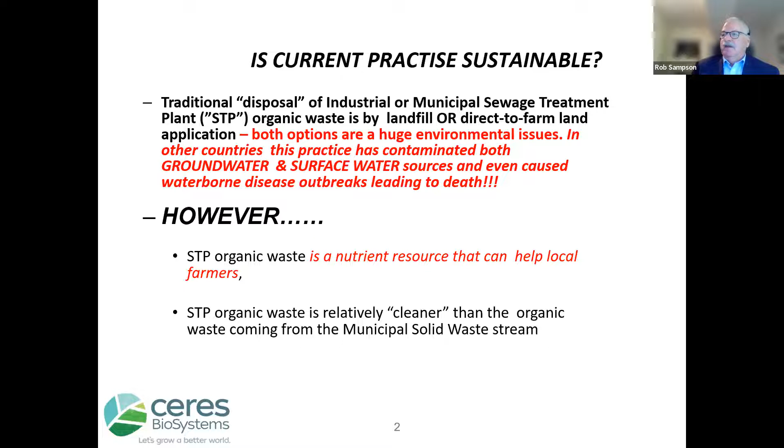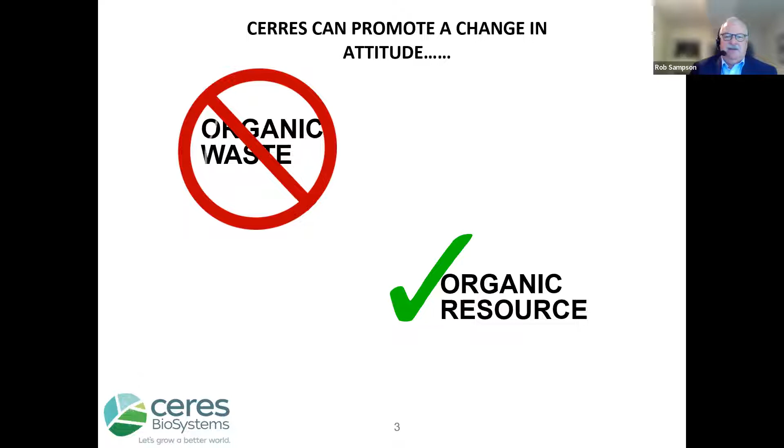In fact, organic waste should be and is now worldwide being seen as a source of nutrients for farmers. I just saw an article recently in the Times of India that says it's time now to think of organic waste as a resource and not as waste. And in fact, that's the attitude change that needs to happen worldwide, not just in India, because we can no longer continue, nor should we continue, to treat organic waste as a waste. It's actually an organic resource.

This is a picture of organic fertilizer that we are currently producing in India now, and we have been for about 6 years with the help of folks like Ravi and his team. And it indicates how we can indeed, on a commercial basis, not a laboratory basis, produce a final product that has nutrient value for Indian farmers.

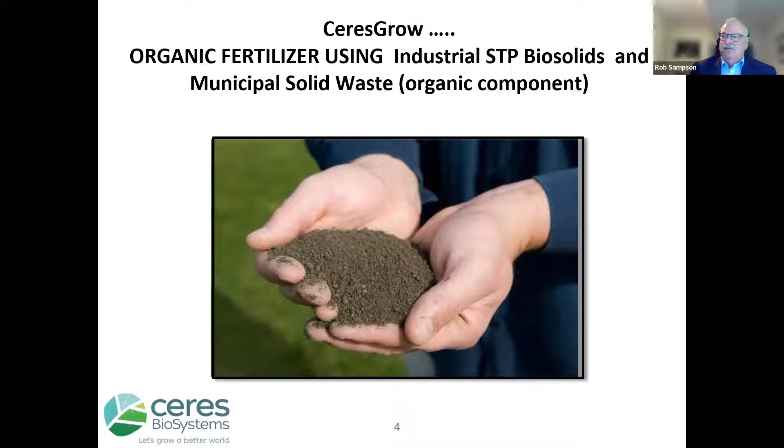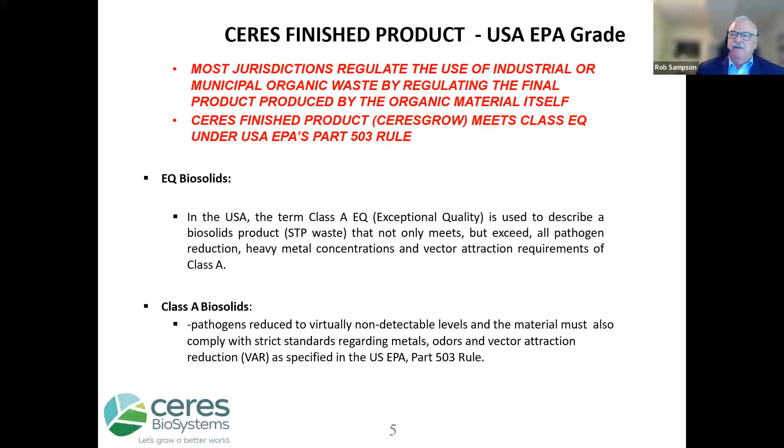The first two here, EQ Biosolids and Class A, are allowed by regulation to be applied to fields as a final organic nutrient to the farmer. The final category, Class B, is generally not allowed to be applied, or if it is allowed on farms, it's highly regulated and application is limited, primarily because of the pathogens that are still contained in the final product.

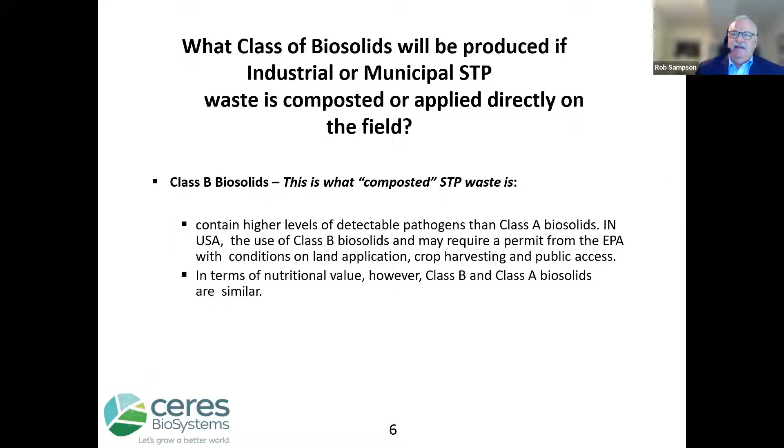Our final product is a fully pathogen-free fertilizer, and it compares quite favorably to commercial fertilizer. You would know it as urea or DAP, either a nitrogen or a phosphorus additive to farm fields. In fact, not only is our product full of nutrients, nitrogen, phosphorus, potassium, and organic carbon, it's also pathogen free. In other words, even though the original raw material is organic waste containing pathogens, our product contains no pathogens and can be handled quite easily by the farmer.

Interestingly enough, we have done some analysis, and some work's been done by the Canadian government on our product as it relates to its GHG impact. And it's been proven that there are up to 2 tons of GHG credit for each ton of the organic waste material that is consumed in our product. That's a credit.

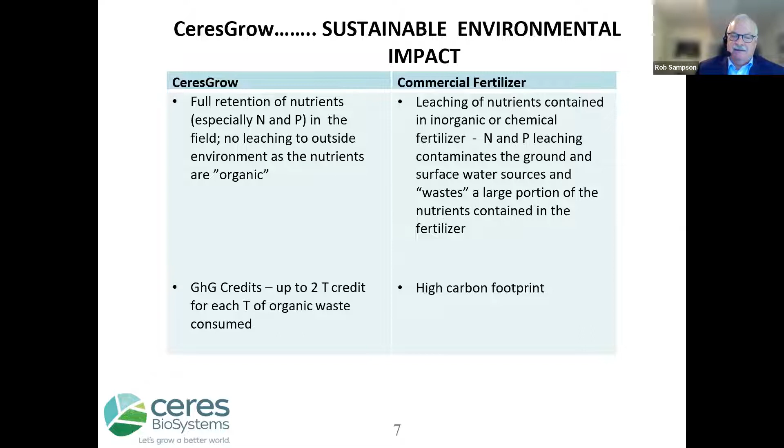Other advantages to our product is it reuses organic waste, along the theme of treating organic waste as a resource, not a waste. It minimizes the wastewater discharge and contamination to water sources that occurs when the raw organic waste is simply landfilled or applied to field without any treatment.

And probably now, even more importantly for Indian farms and fields, it returns organic carbon to the fields and soils. There is a growing concern about the increase in organic carbon deficiency in India's fields, which eventually leads to yield reduction. And that deficiency in organic carbon is actually being triggered by the overuse of commercial fertilizer.

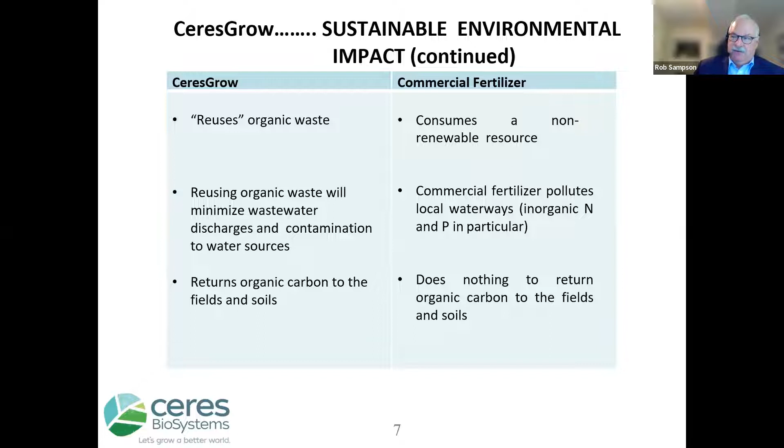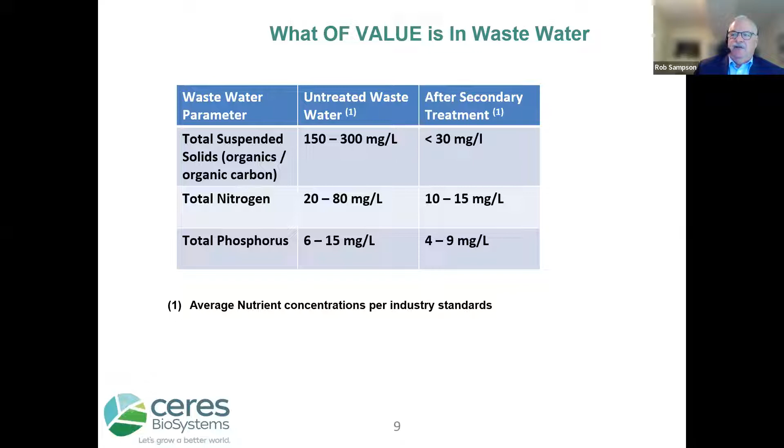Well, there's a large component of suspended solids, which is essentially organic carbon, a large percentage of nitrogen, and a smaller percentage of phosphorus. But when you add all that together, and this is literally just from the wastewater production across the country of India, the nitrogen, carbon, and phosphorus components in that raw material actually equates to a considerable amount of organic fertilizer or organic nutrients that could be applied back to the fields of India in a safe way.

And this is literally just from the wastewater side, not the organic component of any industrial supply. That would add to this volume. These are considerable volumes of organic fertilizer that could displace the use of inorganic fertilizer, i.e. commercial fertilizer, on a sustainable and continued basis. These are yearly volumes that show up no matter what you do.

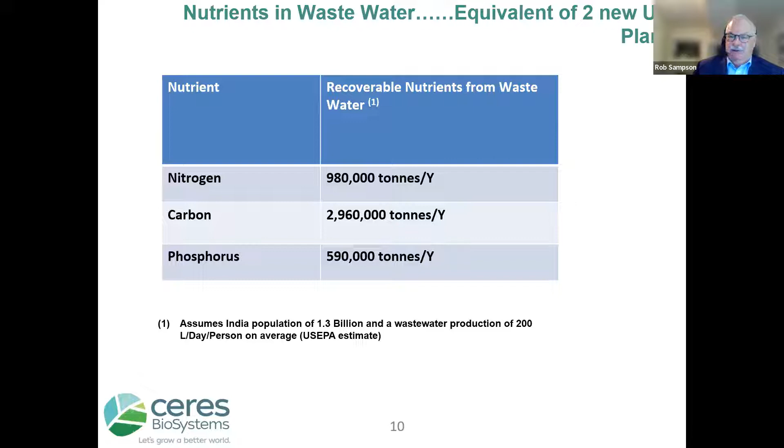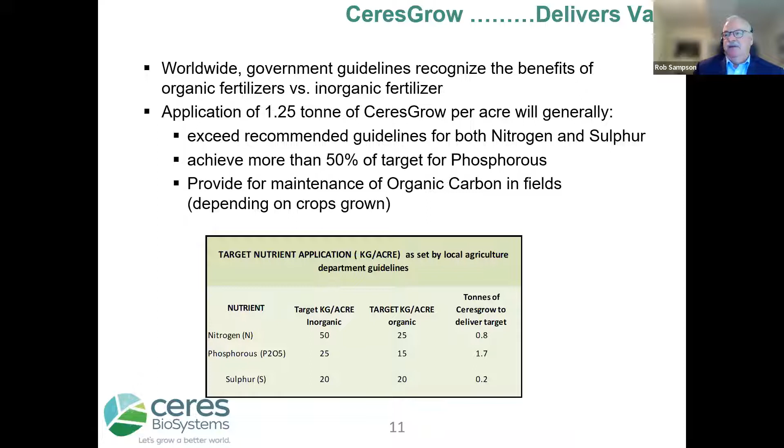So what does our product do? It improves crop yields. It improves the physical condition of the soil. If you are a farmer, these are 2 very important parts of soil management that you need to pay attention to in order to not only keep crop yields where they are now, but improve crop yields.

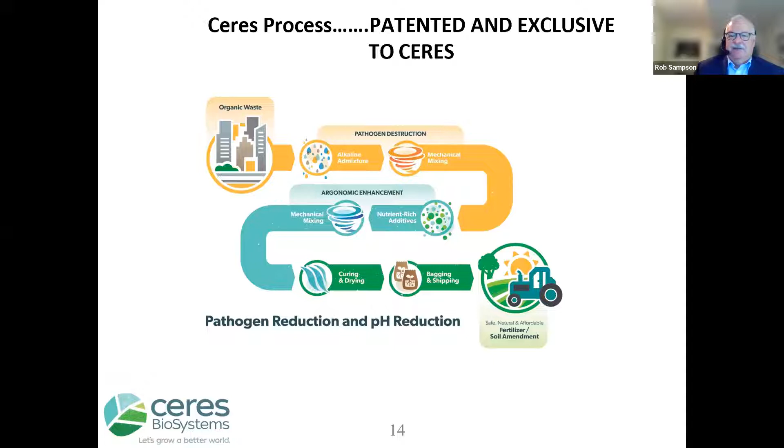In North America, we have the same production process, but we actually stop it at the first stage, the pathogen reduction stage, because soils in North America are highly acidic and they need that alkaline balance in order to improve crop yields. India's soils are not yet as acidic. They are gradually trending in that direction. So at this point in time, we go through the second mixing stage to bring the product back to a near neutral pH range.

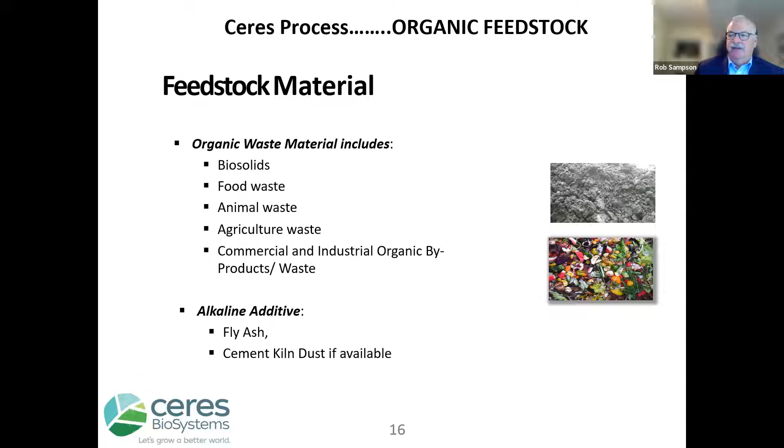Feedstock material. Biosolids are what you would normally call sludge or sewage treatment plant waste, food waste, animal waste, agriculture waste, commercial and industrial organic byproducts. Anything that is an organic material can be used in our process. Our other additive is anything that has a slight alkalinity to it. In India, we use fly ash. In North America, we use cement kiln dust. Both, by the way, industrial waste products.

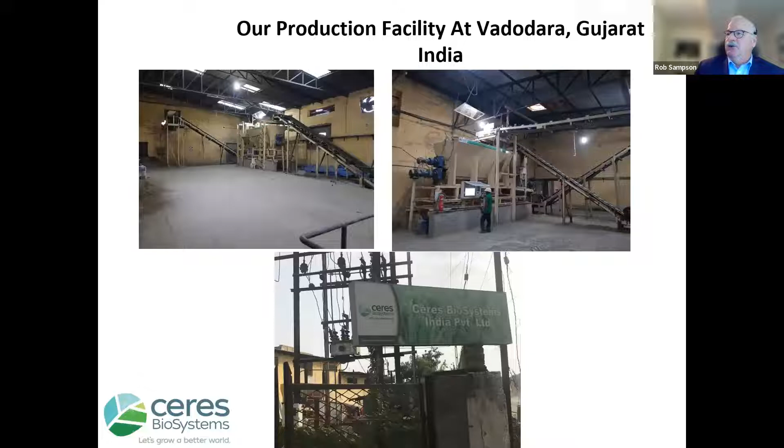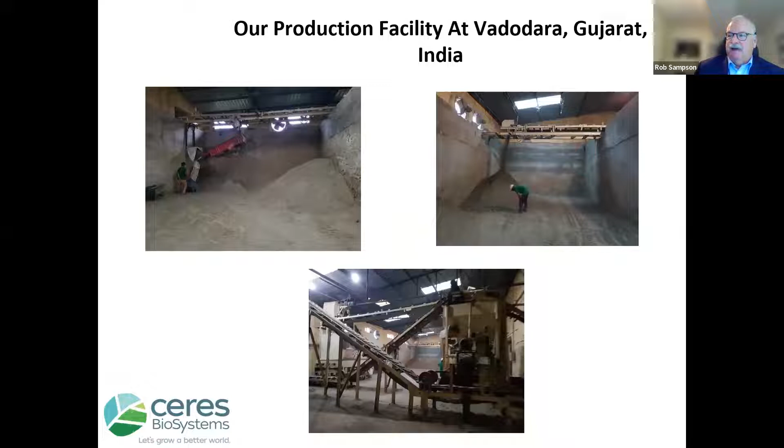Again, some more pictures of our plant. That's the silo on the left, where the fly ash is maintained and stored. Picture on the right is some of our product going off to some happy farmers. Again, in India, it's bagged. In North America, it's sold as bulk material. Those are 50 kg bags sold as a fertilizer control order, city compost organic fertilizer. Those bags would be selling for about 175 to 200 rupees a bag.

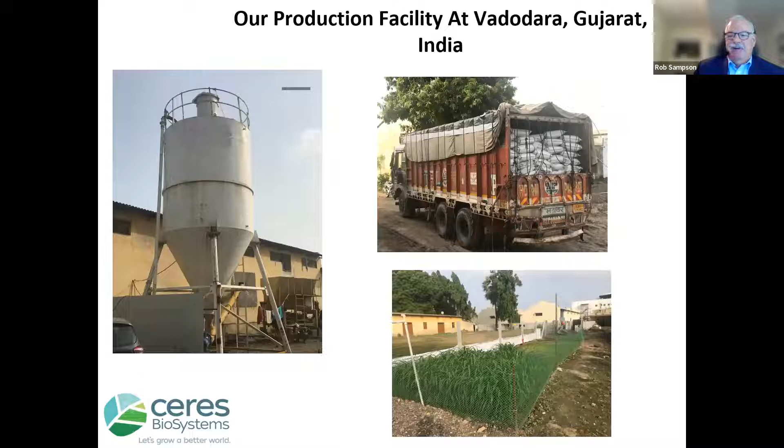And we do some test growing at our own plant. The bottom picture on the right is a picture of our pilot farm, if you will, small little farm that we run at our plant to demonstrate to those who come to see our plant the quality of the final product and how it does generate and produce some good crop yields.

So we do have one existing plant that we have in Vadodara. It's been there since 2016. It currently processes municipal organic waste from its wastewater treatment plant and from its municipal solid waste stream.

But we do have one industrial plant that we are now building in Mumbai. This particular customer we're building a plant for uses Mumbai sewage, dewaters the sewage and uses the water for its cooling process. Well, when it dewaters the sludge or the sewage, it produces sludge or what we call biosolids. And so our plant will be used to take that organic waste that's generated from the dewatering process and produce a fertilizer. So the sewage treatment plant waste volume, we'll see about 3,000 metric tons a year at 80% solids coming in.

We're also processing some effluent treatment plant product as well at the same time. It has a slight acidic pH to it as well. So we'll be mixing that with the sewage treatment plant waste. That's about 1,500 tons a year. And then we're also taking some municipal solid waste, municipal organic waste that's produced by the city of Mumbai, about 2,800 tons. That's only a small portion of what Mumbai would produce, obviously. Other industrial waste that we're managing is about 2,000 tons of fly ash a year coming from a local power plant.

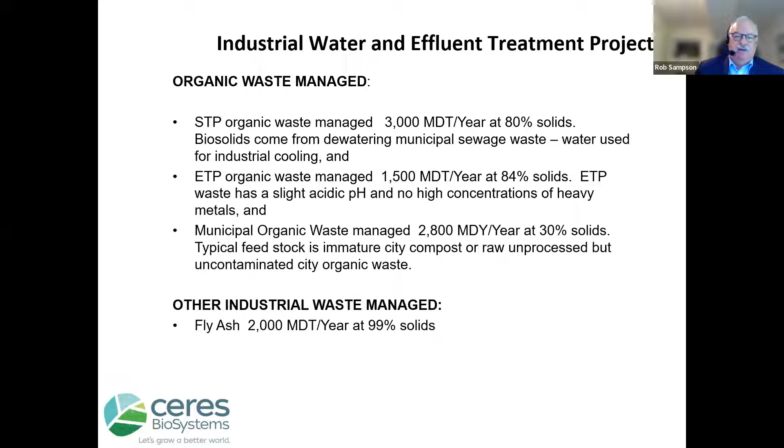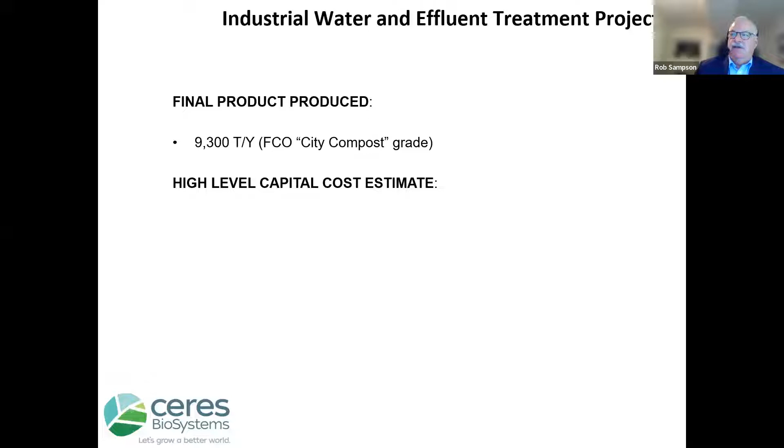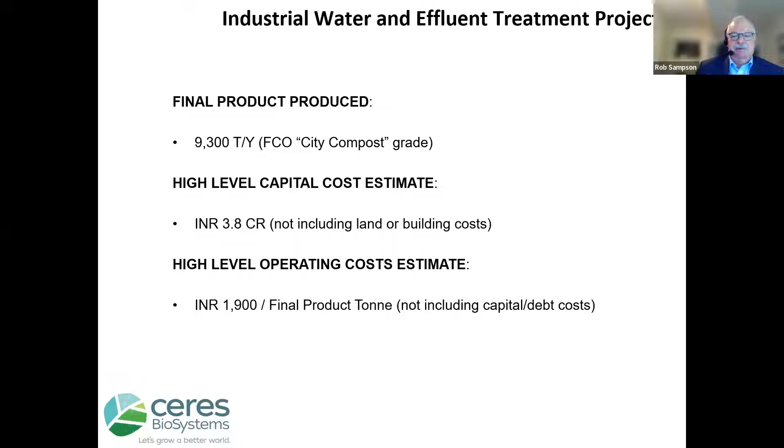So here's some estimates of the final product produced, about 9,300 tons a year in city compost. Initial capital costs of about 3.8 crore, and our operating costs of about 1,900 rupees a final product ton. Remember, I was telling you we sell it for the equivalent of about 2,800 rupees a ton. So there's reasonable margin to be made in this business if you can do it right.

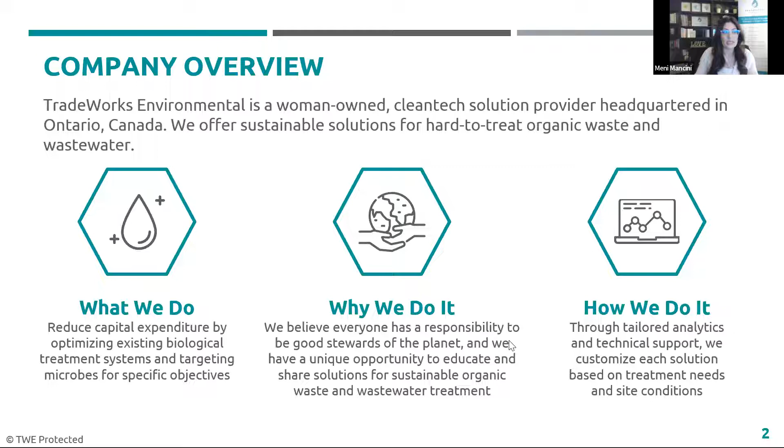What has us get up every day, get up early to really do what we do? And it's because we have a passion to really make a difference. We really take seriously the responsibility that we have to be good stewards of the planet. And we have a unique opportunity like we do here on this forum to really collaborate and educate so that we can really drive more sustainable practices for the organic waste and wastewater treatment industry.

And really, there's no time like the present. When we take a look at our world today, it's important for us to really become aware of the impact that we're having around the world with our practices. And the pace of growth and the pace of industrialization is outpacing the pace of innovation.

And just a few little stats that really put into perspective the pace of growth. Over 2 billion tons of organic waste is produced annually, and that's increasingly growing. And scarce water resources are being maxed, and the global industry for industrial wastewater treatment is valued at over 10.9 billion. Industries and municipalities face challenges and pressures to do more with less.

And that pressure really results in a lot of challenges that a lot of these utilities have to deal with: increasing growing population, aging infrastructure, inefficient practices, budget constraints, environmental regulation, and increasing number of weather events. All of these pressures, a combination of these pressures, these industries need to deal with.

And therefore, it's important now more than ever before to find innovative solutions to improve efficiency and performance of treatment without adding additional footprint. Today's practices aren't sustainable and cannot keep pace with the increasing demand for water and for land. Radical change needs to happen.

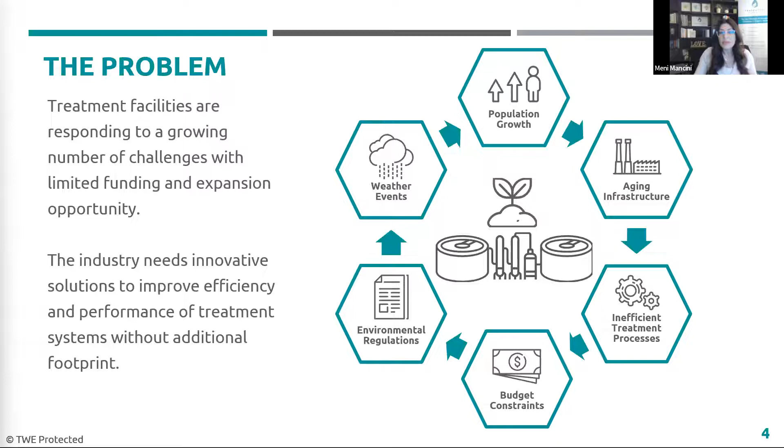And we feel that at TradeWorks, through our solution offerings, where we combine biology, equipment, analytics, and know-how to address some of these wastewater challenges, we're well positioned to help existing systems to optimize their processes. And that's really our focus, the focus of optimizing the biological treatment process. So we offer 4 solutions essentially to support facilities.

The first is we focus on prevention by using our microbial formulations. We have a suite of 25 formulations that are designed to really optimize the existing treatment processes while they offset some of the negative byproducts. And I'll share a little bit about that. And not only does this drive performance benefits, but it saves money.

And supporting the use of our microbes, which are applied at different stages and for different performance targets, we have the Ydro process. The word Ydro is an ancient Greek word that stands for water and the sacredness of water. And we have it represent the importance of the stewardship we need to have in this precious resource.

And so the Ydro process combines these formulations with analytical capabilities to really systematically target improvements and optimization. And we synthesize complex data to really help make important and powerful decisions on improving the process.

And we also have a piece of equipment, which is our biologically enhanced primary screening, which is designed to provide water as clean as a primary clarifier without the need for that step for wastewater treatment, which means that countries that discharge untreated wastewater into the environment would really benefit from this technology because we're able to provide significant degradation. And I'll share a little bit about how we achieve that.

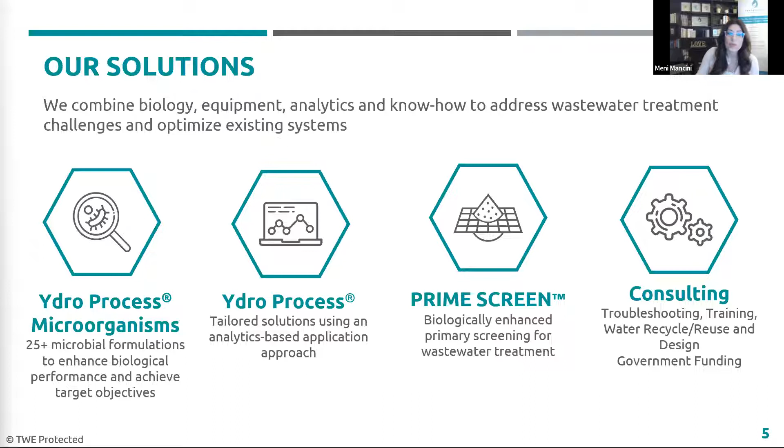And of course, underpinning all of our efforts is our technical know-how, and we really support and advocate for water recycle and water reuse and support the design of these types of systems because of the importance of our water resource. So with our technology, primarily focused with our microbial additives, we are able to support the circular economy, and we benefit many users around the world.

So this slide really indicates the different types of applications where we utilize our microbial formulations. So for example, we apply our microbial formulations in collection systems around the world in order to reduce H2S, break down fat, oil, grease, and deal with sludge. Our prime screen is used to boost and enhance performance.

We can optimize biological nutrient removal in plant, as well as we work with different lagoons, such as sludge lagoons in remote communities like Hawaii, where we're optimizing these lagoon systems. We're bringing them back into compliance. We're helping facilities achieve compliance through the use of our microbial additions.

And we also support waste to energy, enhancing anaerobic digestion if that's the path the organic waste is taking, as well as we can improve the efficiency of compost by creating better quality compost and reducing the odor and so much more.

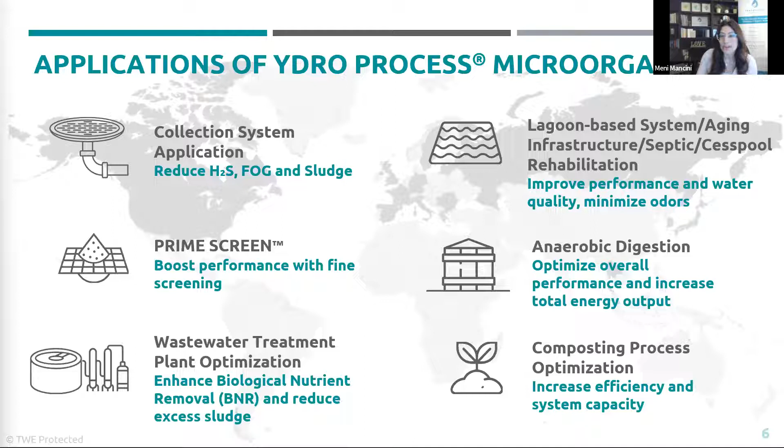So essentially, I want to share a little bit about our microbes and what's so unique, because all these biological systems operate through the use of the microbes that are found inherently in these systems, but they have a lot of byproducts such as odors. The difference with the addition of our microbes into the various systems, again, according to the targets, is that our microbes are designed to boost and enhance the microbial activities.

So if the target is to degrade, then they will enhance the degradation. If the target is to improve the nutrient quality, they will do that, because we have a suite of formulations that achieve that. But key is that our microbes take different metabolic pathways.

And because they take different metabolic pathways to degrade waste, they have more efficiency from an energy consumption perspective. And we can deliver significant benefits by not releasing the H2S, by disengaging the mechanism of what creates the H2S.

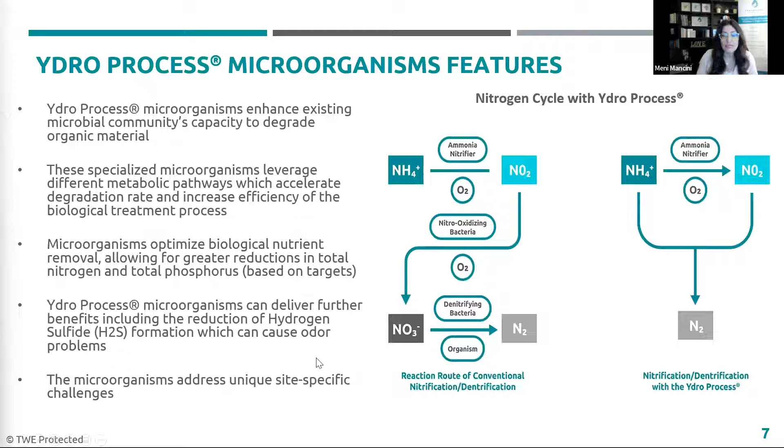But just to give you an example in how we work in different industry applications, regardless of where the industry is discharging, for example, if it's discharging into a recipient, a body of water that has much stricter requirements in their permits and the types of parameters they need to meet, we can support them in that. Or if they are discharging into a municipal sewer grid, and so they would require some pretreatment.

The overall essence of what we can do is we can substantially save a facility their operation and maintenance cost, make the wastewater management process more efficient, more effective. We can also work to help them earn and monetize carbon credits. I'll talk a little bit about that.

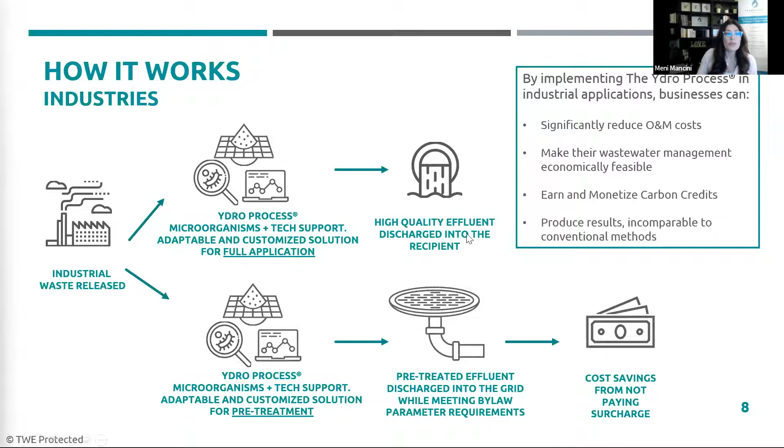But typically the biggest difference with the addition of our products, our equipment, and our process is that the alternative is to build bigger. In order to enhance treatment capability, you require a larger footprint. And so utilizing the same footprint, we can produce a higher quality effluent product and process.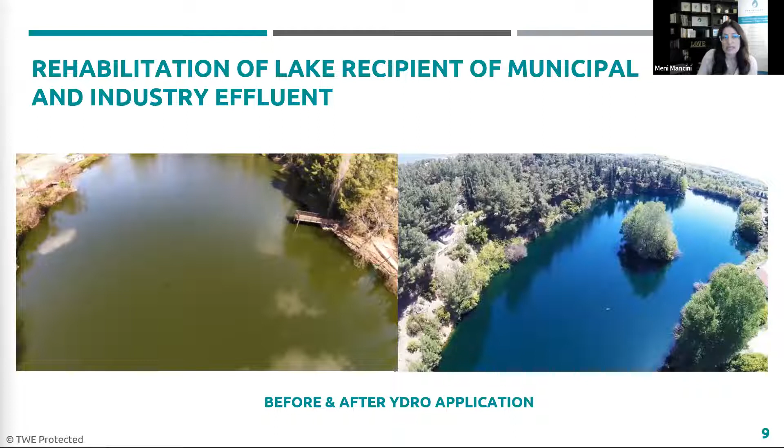And so there's lots of opportunity for us to really expand our footprint in many countries that really need to preserve and protect their precious ecosystem. And for the next part of my discussion, I'm going to focus on some of our innovative applications. I want to talk about the methodology as an example of how we approach the thought process of how we apply our methodology. Not that it directly overlays in any industrial application, but it gives the idea in terms of how our process could work.

So the most beneficial and innovative preventative approach to the application of our Ydro Series product is within the collection system or the sewer system. By dosing the product in manholes, lift stations, in collection systems, we're able to precondition the water before it enters the treatment plant. So in addition to the odor and FOG reductions, the influent quality is significantly improved, resulting in more downstream benefits.

And we can also support industrial contributors that are discharging into the collection system or into the sewer system to deal with various biological process issues, leveraging that preconditioning of the water before it enters the treatment plant. Conventionally, the collection system is only used for conveyance, to convey the water to the treatment plant, and treatment happens at the plant. And then when additional loads take place, there's burdens on the plant, and to enhance the treatment capacity, expansions are typically required.

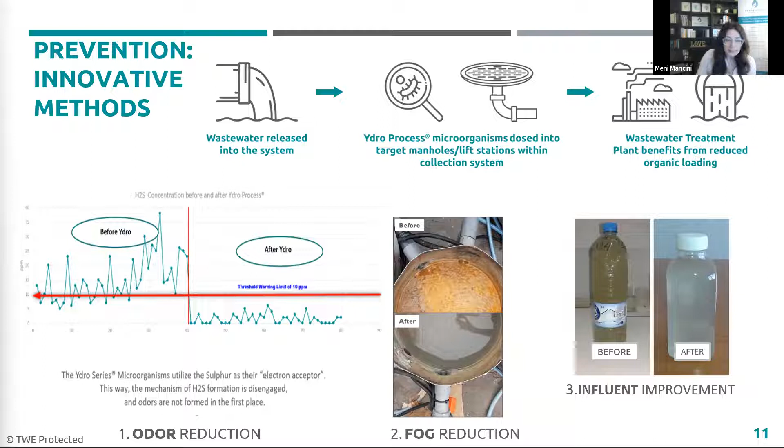And so I'm going to share two use cases. One is where we are applying our microbes in the collection system, and we have our very fine screen technology for a municipal treatment plant. This plant is located actually in the United States, and the objective of this application was to really support the municipality with eliminating odors. They had frequent odor complaints, and they also had industrial contributors that were producing sauce manufacturers, high fat oil grease. And so there was significant clogging within their collection system.

And they were also challenged with the regulators forcing an enforcement act to deal with that, because odor is not only a nuisance, it's also hazardous to health. And we also introduced our fine screen technology in order to deal with all the junk that people would normally throw into their toilets or that collect through the collection system that would create burden in the treatment process.

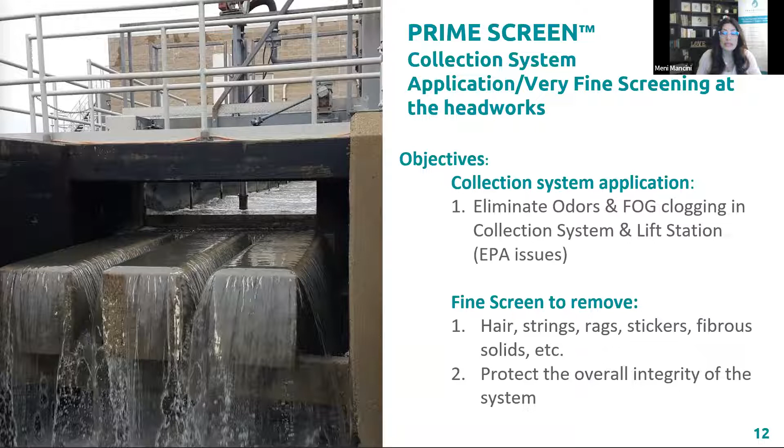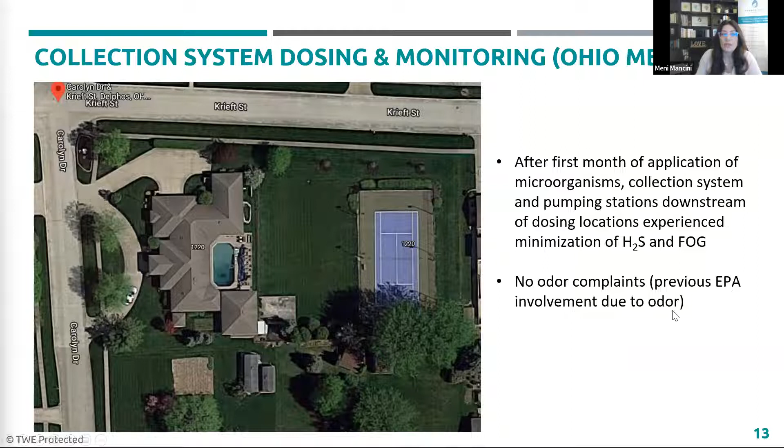So this is just an indication of a lift station, which is an example of urban sprawl and how municipalities are faced with communities expanding, industry expanding. So now they're bumping up against infrastructure. And notice how close, and this is the lift station that was clogging significantly, close to home, and there's industry further up. And after the first month of applying our microbes in the collection system in targeted locations, we were able to minimize the H2S, and there were no odor complaints where previously they had odor complaints to the federal agency that was involved.

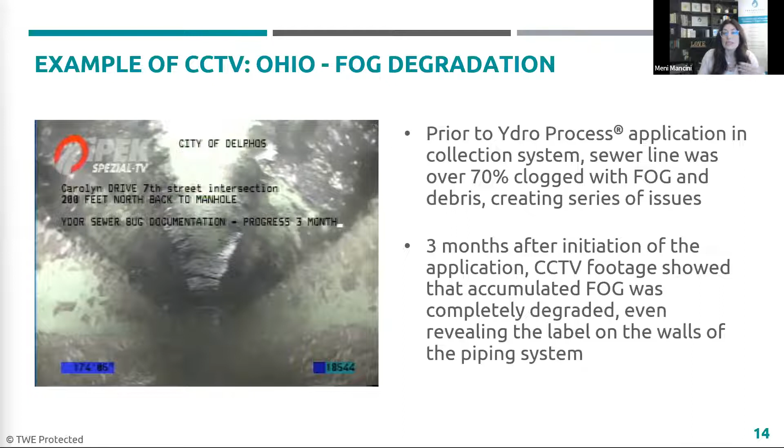Prior to our application, there was CCTV to establish effective baselines. So prior to the addition of our microbes, the sewer line was over 70% clogged with fat oil grease. And after 3 months they retested with CCTV to do a comparative. It's always important to have baselines and then have comparatives to demonstrate the effectiveness of an application. We were able to demonstrate how we effectively degraded the FOG, that they could even read the label within the piping system. And more importantly, they were able to reduce the frequent maintenance that needed to take place on these lines.

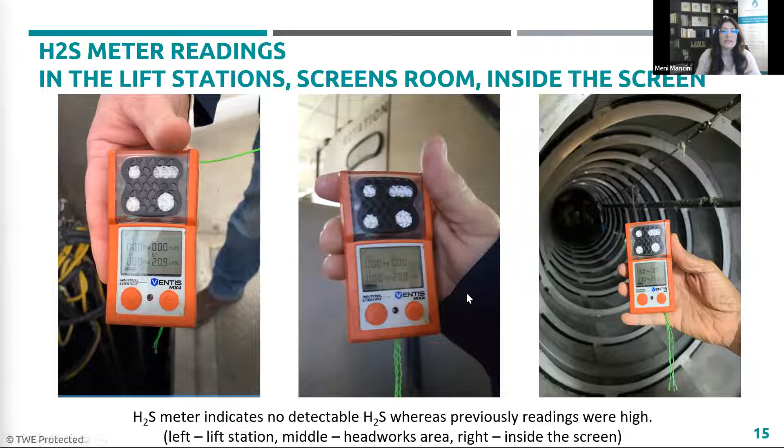And this was especially important during COVID, where the more safety we can provide for operations staff, where they're not coming into contact with sewage, was important. Prior to our application, the H2S within the areas in a facility that typically would be stinky, for example, this is the H2S reading in the lift station, the middle is in the headworks, and this picture on my right is inside our screen. Normally they would have significant H2S creating alarms, and the operations staff would have to have their meters for safety. We were able to reduce the H2S to 0 because our microbes are designed to focus on prevention and to disengage that mechanism of what creates H2S.

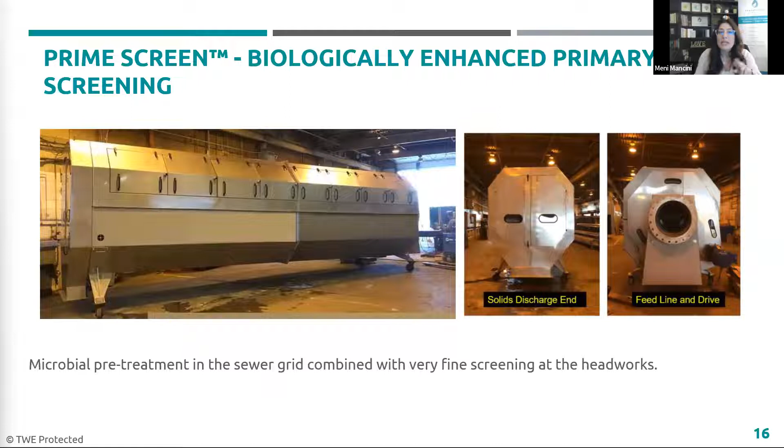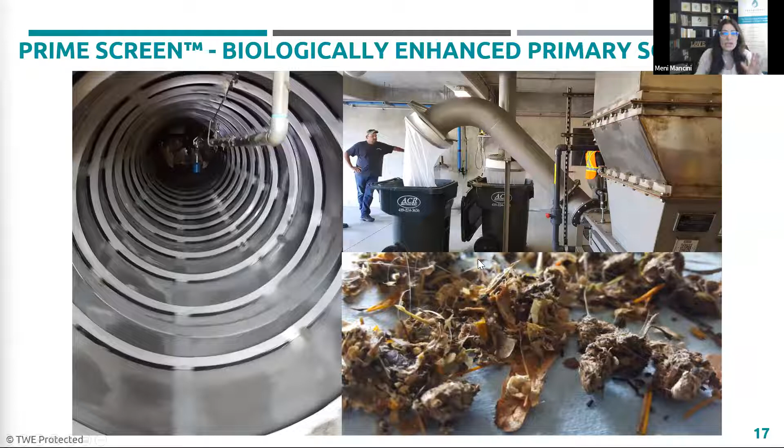Now, this is an example of a municipal plant. However, the screen can also be applied in industry. We commission and adapt according to what the targets are and what the wastewater treatment process is. And we have an automatic compactor that will bag the screenings. So there's no need to come in touch with the screenings at all.

But more importantly, when we look at the key parameters and what the average influent parameters were prior to the addition of our prime screen, which is the fine screen along with the microbial activity, we are able to provide significant reductions in BOD as well as TSS, phosphorus, nitrogen. Normally, you would need to add an expansion and an additional treatment process in order to achieve results like this.

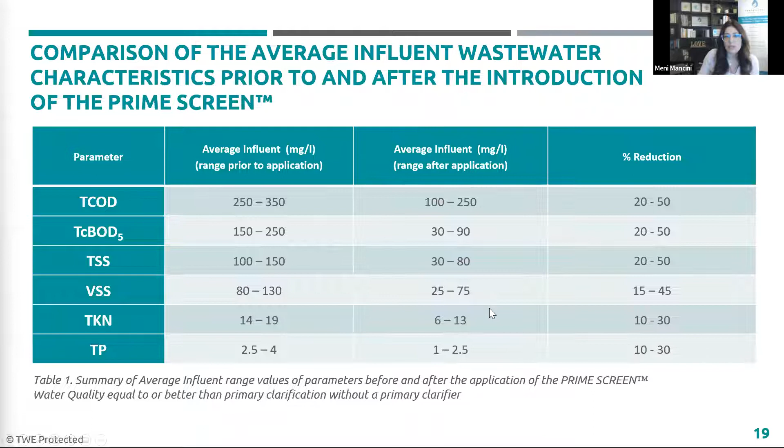And so in summary, with this application we were able to eliminate the odors and fats, oils and grease, really support the community, and they no longer faced the enforcement acts they were subject to. We were able to reduce their operations and maintenance costs by 35%. We saved them a $5 million expansion.

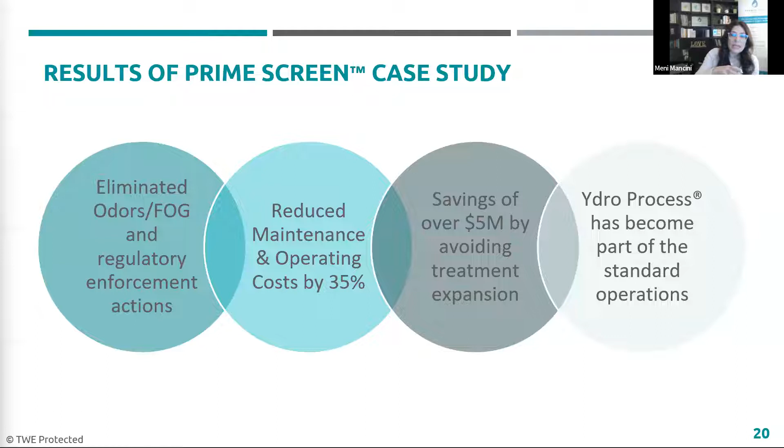And now our process has become part of the standard operations for over 3 years. And we're able to support the industry with its variability in treatment process. And that's why I wanted to really introduce the municipal application, because often they do tie in, and industry will impact the application within a municipality.

Moving on to another application. This is an industrial application in Thailand. This project is an industrial wastewater treatment plant that is treating wastewater from an industrial estate area, specifically for natural rubber processing. The objective of this project was to determine the efficacy of the biotechnology with introduction into this type of application.

And the objective is really to improve the effluent values of the wastewater treatment plant so that the discharge is improved. As you saw in the picture of the lake, we want to really work to improve the qualities and be better than we can, so that the recipients also have the benefit of improved quality. We wanted to work with this facility to control and minimize their shock loading effect based on the variability in production and their cleaning procedures, and also to enhance the overall performance and efficiency.

The challenge as well, especially during COVID, was huge staff shortages. Thailand was hit very hard with COVID. And so if we can help save on staff usage by improving the overall biological process, that was important to them, as well as to minimize energy consumption and really focus on minimizing odors and FOG.

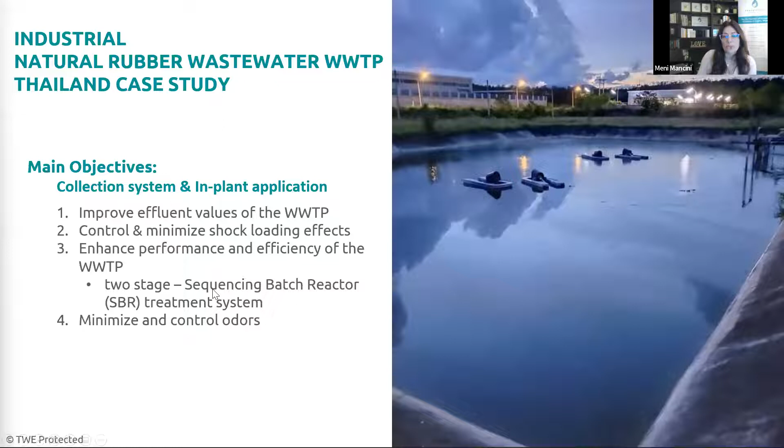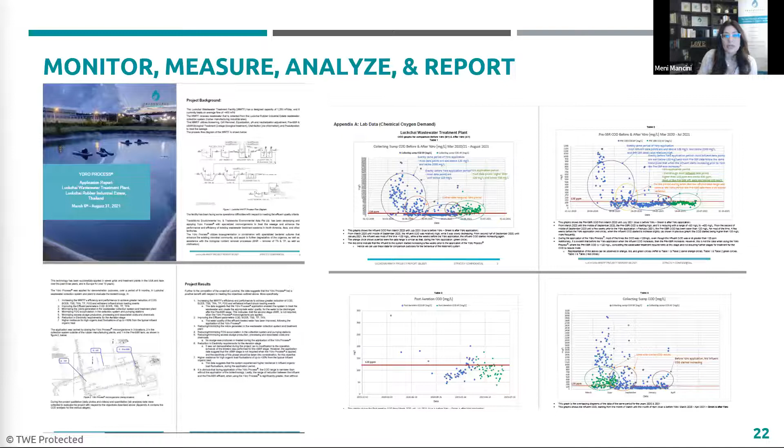And with our applications, we work on monitoring, measuring, analyzing, and reporting. So the results that we produce really follow a scientific method. And the more information that is provided from a baseline, the better we can show the performance results through a data-driven approach. And if the baselines and the proper parameters aren't being monitored, we ensure that there is a stage for establishing proper baselines. The better we can monitor and measure something, the more effective the results and the demonstration of the results can be, and then they can be quantified.

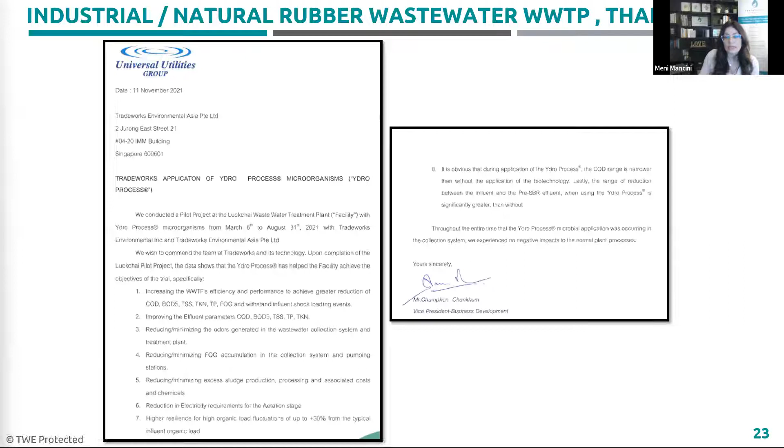And so we were very successful with this application. We received letters of recommendation, and we're working closely with the trade commissioners in that region so that we can expand our efforts in that market. And ultimately, the results that we were able to produce significantly improved their effluent values and improved the criteria overall. The shock loads were minimized.

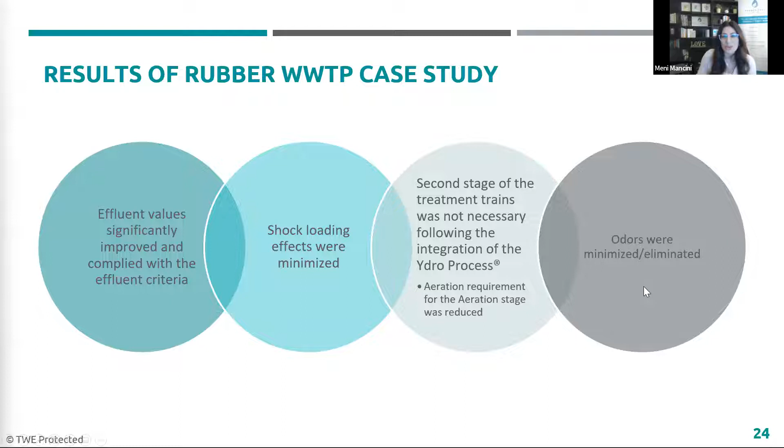The second treatment stages were not required because our microbes are efficient and take different metabolic pathways. We were able to minimize the need for secondary processing, and the aeration stage energy demand was reduced. And our sweet spot is targeting and minimizing odors, and we were able to accomplish that. So this is just a really quick snapshot of 2 case studies that we have.

The commonality of our efforts and the benefits of our solution is really offsetting the negative byproducts, such as reducing H2S and reducing fats, oils and grease. Revitalizing aging infrastructure to increase capacity is something we're also doing in countries like Singapore and Canada and in different parts of the States. We can reduce the organic load to treatment facilities. If the target is to decrease excess sludge, we can degrade it on site. So even though there is a value for sludge, whether it's waste to energy or waste to reuse, often the cost of that processing can be expensive from transportation and additional processing.

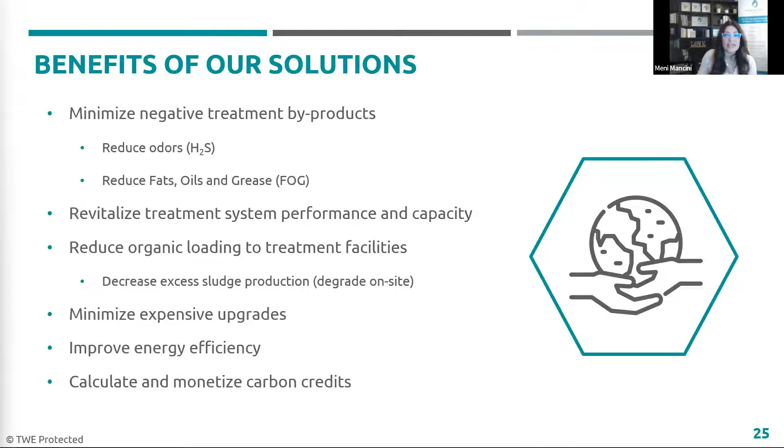And where the target is for us to work on decreasing the sludge on site, that is something we have formulations to achieve. We can assist in minimizing expensive upgrades, improve energy efficiency, and we also work to calculate and monetize carbon credits. And as our previous speaker, Rob, mentioned, it is a complex process, but it definitely can provide some significant financial advantage to offset some capital costs for different applications.

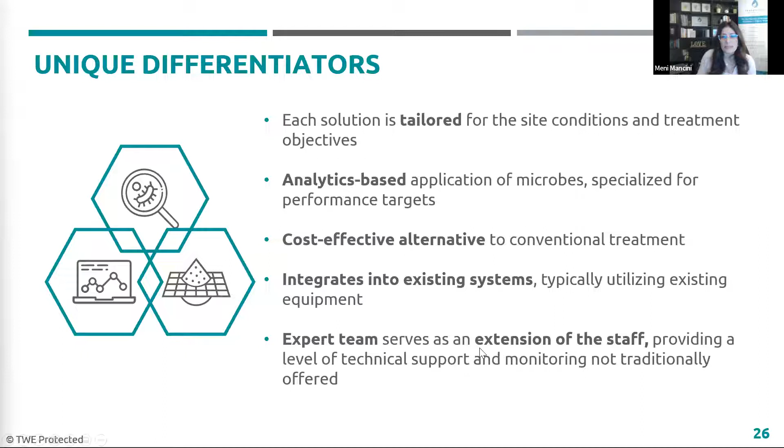So in closing, I just want to share a little bit of our unique differentiators. Our solutions are tailored for site conditions. We integrate into existing systems. We take an analytics-based approach. We're cost-effective compared to alternatives that enhance or increase footprint. And we have an expert team that acts as an extension and can share and expand knowledge, which is essentially what we need to do, collaborate to advance the industry, advance knowledge.

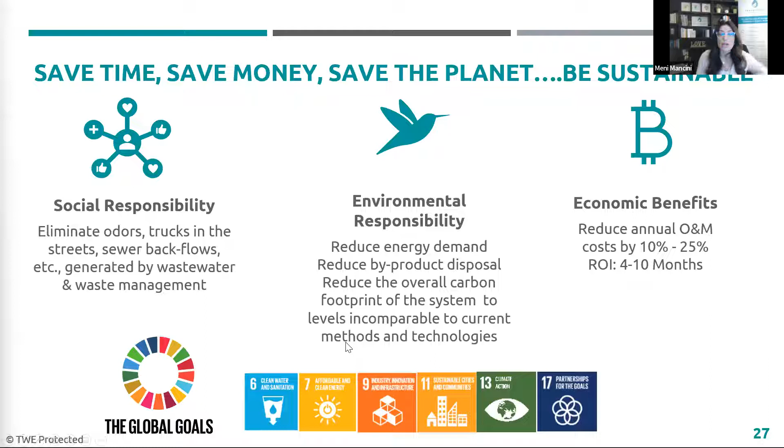And really through our solutions, by using nature and empowering nature and providing the support to the biological community, we're able to save time, save money, save the planet, be sustainable, provide social, economic, environmental benefits, and really demonstrate how we're moving the global needle forward in sustainability. And we work with our clients that are interested in establishing the right metrics on how our technology is really moving these numbers forward in sustainable development goals.

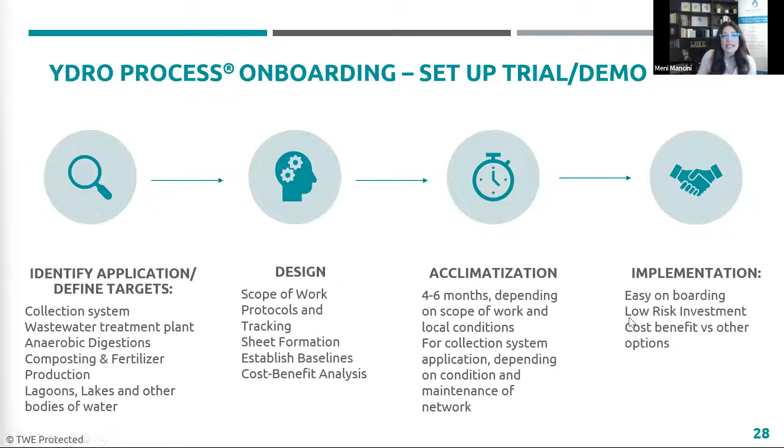And our process is integrated, so we work at identifying targets. We provide a design experiment, if you will, a scope of work. Acclimatization is quick, especially with the use of our microbes. It's easy onboarding, low risk to demonstrate the effectiveness of microbial addition and empowering nature.

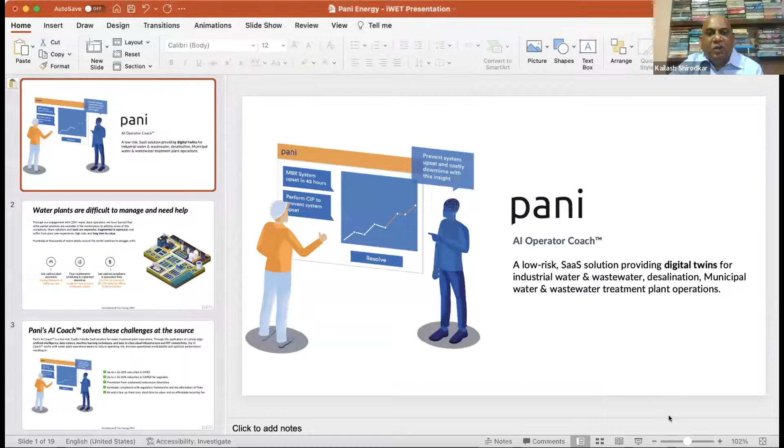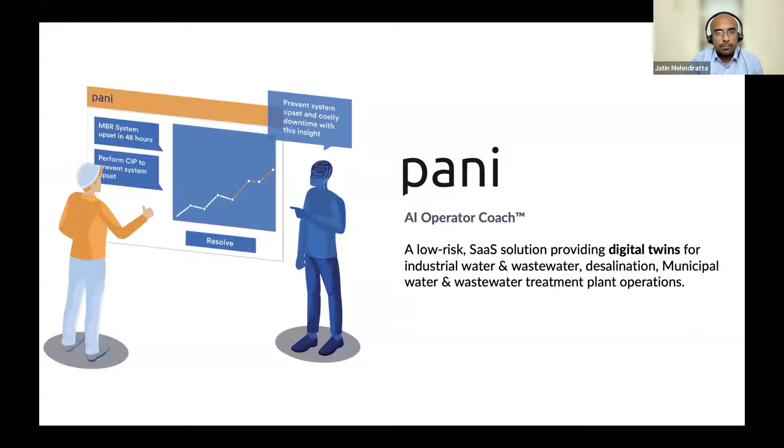So Pani Energy, we are actually bringing forward a decision support or a decision expert system for all our water treatment plants, whether they are industrial water, wastewater, desalination, municipal water, wastewater. So we're bringing forward a product called AI Operator Coach, which is a digital support or decision expert system for the operations. We all understand that there are multiple difficulties, and our teams are actually managing those in real time, right?

We have been engaging with a lot of plants across the globe, from Canada to North America to Southeast Asia, India, Middle East, and we have understood there are majorly three challenges that water treatment plant operators or owners are battling with. The first one is on the operational side of day-to-day engagement with the plant, right? So they don't have a real understanding of what is happening in the plant. There are some suboptimal issues that they are trying to improve with multiple technologies available handy for them. They are trying to do better performance reporting in order to tackle the overall aspect of the plants.

The second major pillar in which our operators and plant owners are challenged is from a maintenance perspective, right? There are a lot of challenges in the scheduling or the unplanned downtime that are coming. We understand that a lot of these plants have reactive maintenance, or rather scheduled maintenance. They don't have real-time insight of what is happening in their plant on a day-to-day basis, so that they can have a better understanding of what's happening in the plant and can make early interventions. This is where a lot of plants are actually trying to optimize their operations.

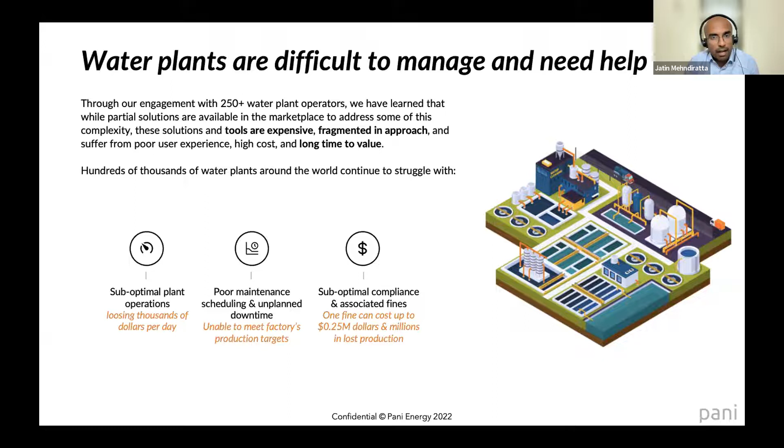In order to solve that, we bring forward, as I said, a decision support or decision expert system, which we call AI Coach or AI Operator Coach. This is a software service for all our plant owners and operators, bundled together with leading technologies like artificial intelligence, machine learning, cloud, and IoT. All of these are bundled together and available for all our users in a subscription. It is as simple as using Netflix, Amazon Prime, or Hotstar today, and we offer this in a very low risk and capex friendly business model for our users to not invest anything upfront, but use it as a monthly service or a yearly service as they see fit.

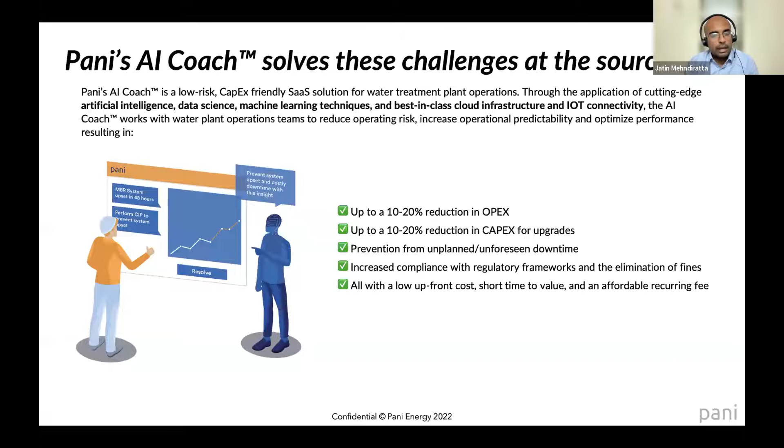With AI Coach, the water treatment plant operational teams are now able to have more reliable operations. They're able to optimize their risk. They have better predictability in their operations. They are able to know what is going to happen in the plant in the coming hours or coming days, so that they can plan well in advance and optimize the overall performance. Right. And all of this, as I said, is available in a subscription model, which our operators and plant owners can adopt. Now, our AI technology is very, very purpose built for water treatment.

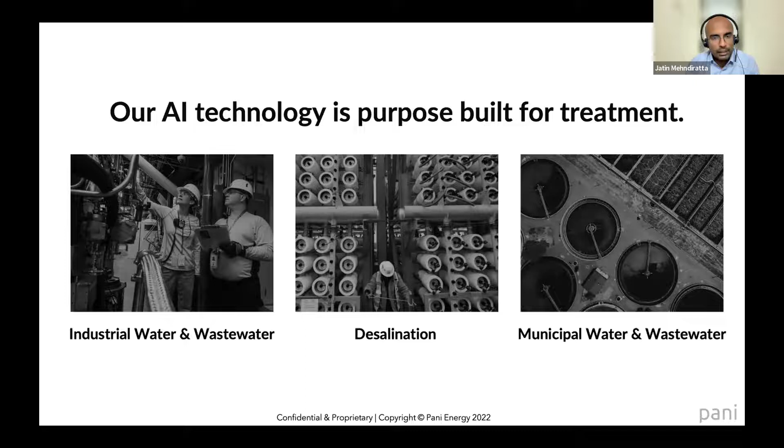Pani Energy as an organization does not provide their technology into any other industry. We are very, very focused on water treatment, and majorly in three major applications. First one, industrial water and wastewater, whether it is process, food and beverage, pulp, paper, etc., or it is ETPs, we are catering to both of those. Desalination, municipal water and wastewater, both in WWTPs as well as STPs, we are catering to all of these applications and have customers live in all of them.

Now, just a very quick snapshot. Pani Energy is a Canadian organization which got spun out of 6+ years of R&D and hundreds of plant visits and interviews, sitting with the operators and maintenance teams and process analysts to understand what's actually happening in the plant and how they are trying to solve these problems. What could be done better around it, right?

We came into commercial operations in 2018, and since then we have been awarded across the globe and have been recognized by a lot of players for the technology that we are bringing to life in multiple plants. From Global Water Intelligence to very recently, we have been named in the top 100 companies around the globe in the clean tech space by Global Clean Tech Program, and we have been awarded by Suez, PUB, and been adopted by a lot of these players that I'll talk about as we go forward.

Now let's get into the crux. How does all of this happen, right? It happens in 4 simple steps. Whatever stage your plant is in, whether you are running manual operations with manual logbooks, or you have sensors, PLC, SCADA systems, or DCS in place, whatever is the digital maturity of the plant, we engage with you at that particular moment.

So we collect the data from your existing ecosystem, digitize it, and take it to the platform where it runs through Pani's proprietary models. Those proprietary models start giving you real-time actionable analytics, alerts, and notifications, which the plant's operational staff, managerial staff or process staff then have the opportunity to take as recommendations and make an action. Now, make an action is very, very key here, where we act as a decision expert or a decision support system.

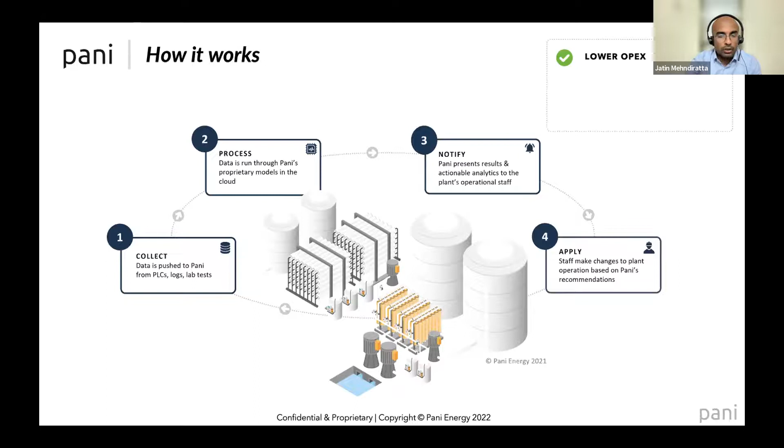Now expanding on what it actually looks like and how our customers are able to actually use it. It's a web-based platform, so there is nothing specific that you need for it. It could be used on any kind of device: your normal laptops, your PCs, your tablets, whatever mobile phone you're using, Android or iOS. It is device agnostic, and if you have a device and internet access, you will be able to access and use AI Operator Coach.

Rephrasing, how do we actually use it? So let's say you have a couple of sensors or multiple sensors in the plant, or SCADA or a PLC, we fetch all of that data from there and take it to the platform. There is parallel or only manual entry in case you're using manual logbooks or lab tests or others. All of that could be fed and digitized through our platform in a very intuitive way.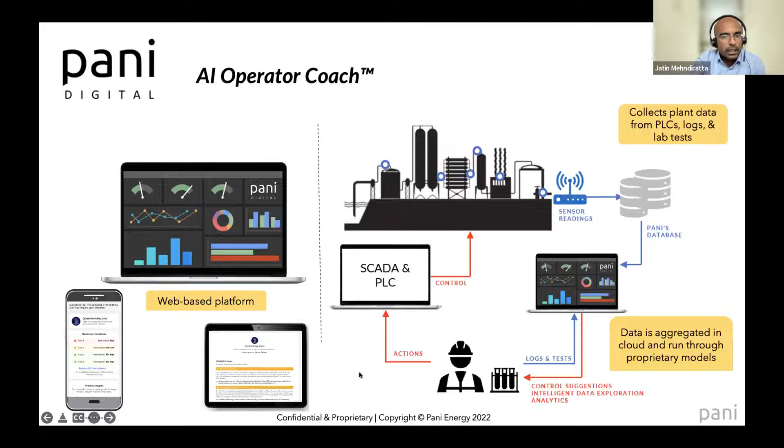All of that goes into the AI Operator Coach, which starts giving control suggestions or actionable analytics to the operators or managerial staff, who then have an opportunity to take that action and control the plant through your existing control narrative. Now, when you're doing this, what exactly are you getting out of it, right? We give a lot of different values which are used by different stakeholders present in the plant.

A few of these might be used by operators, a few of these might be used by both operators, site in charge and process analysts, and a few of them only through the leadership and the executive team, right? So we give set point recommendations, we give real-time alerts and notifications of what's happening in the plant, what is going to happen in the plant.

We give you predictive insights in terms of this is the problem in the plant, why this is happening, what is the impact of this particular problem that is going to happen in the plant, as well as what you can actually do to solve it. So it not only is identifying the problem, but it is also going into a root cause analysis and giving you a prescription of how to solve that.

In parallel to that, it is actually mapping all your key performance indicators, giving you all the performance metrics on a click of a button to understand what's happening, give you real intuitive dashboards, access to all the historical data. So from the day you subscribe to the platform till the day you have access to the platform, all your historical data is there in the platform and can be downloaded or printed on a click of a button, right? So you can build all your reports.

And when I say build reports, these are automated reports. So you can build a report, configure a report, all of these reports on a regular basis, whether it is daily, weekly, monthly. Platform will compile those reports, generate those reports, and automatically send those reports to respective stakeholders that you would want to. So you don't have to build the report, you don't have to download the report, and you don't have to send the report. All of that gets automated from the plant. And by all of that, Pani brings forward a digital twin of your water treatment facility.

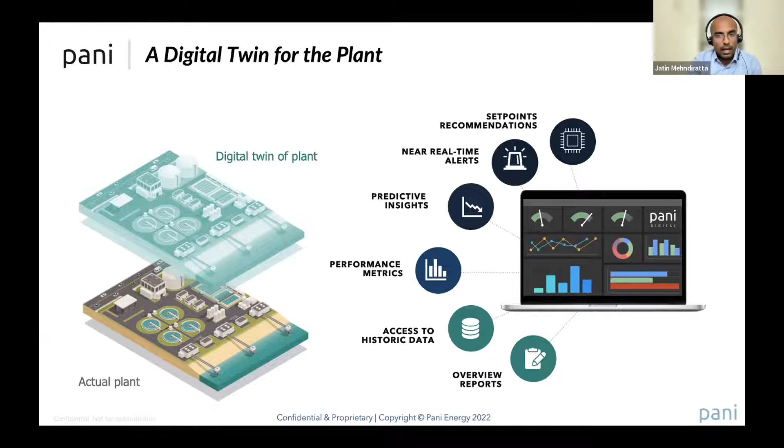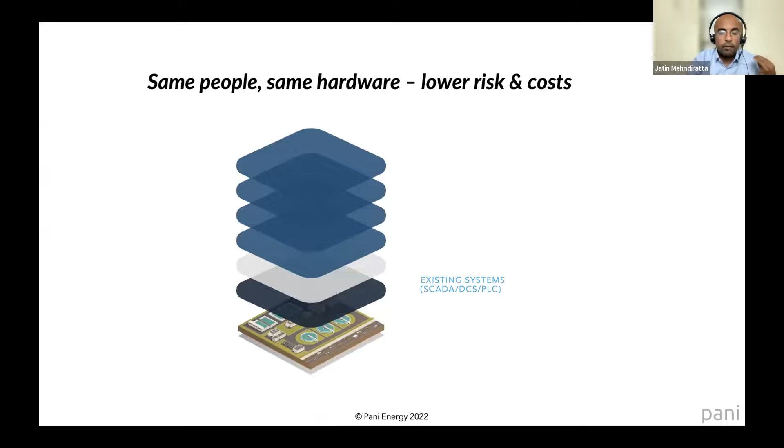Okay. Now, a lot of our customers confuse us that we are going to recommend a change in hardware, we are going to recommend a change in process. No, we completely work with your existing systems, whatever you have. In case you are not using any digitized systems, we have a tier or a level available where a lot of our customers are actually feeding manual data and are leveraging all of these benefits out of it, right? So Pani AI Coach actually comes on top of your existing technology, whatever you are using, and starts giving you more prediction, more understanding of your data, so that you can optimize your operations and take decisions well in advance and accurately.

Now, as I was explaining, it's a web-based platform. It is designed keeping in mind the different roles that your various stakeholders have in the plant, right? So you have your operators, you have your site in charge, you have your process analysts, you have your plant engineers, you even have your executive and the sales teams, which are actually managing a lot of your customers. So this platform is actually defined and designed in a way that all of these stakeholders get access to the relevant data that they are looking for.

The executive team might not want to go very deep into a process the way a process analyst might. So the overall platform is designed in such a way that all of these stakeholders are able to use the platform in a very intuitive way and get all the information and decisions as and when they want, right? So all of the time sensitive issues, whatever is critical in the plant, is actually going to the operators or the stakeholders on a real time basis on the platform, through emails, through SMS.

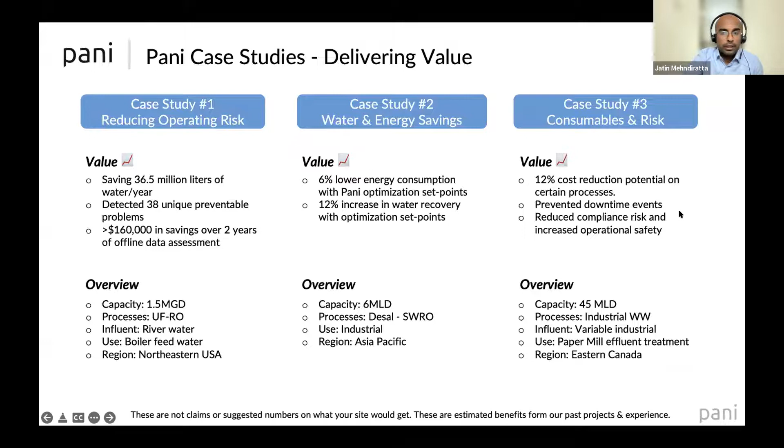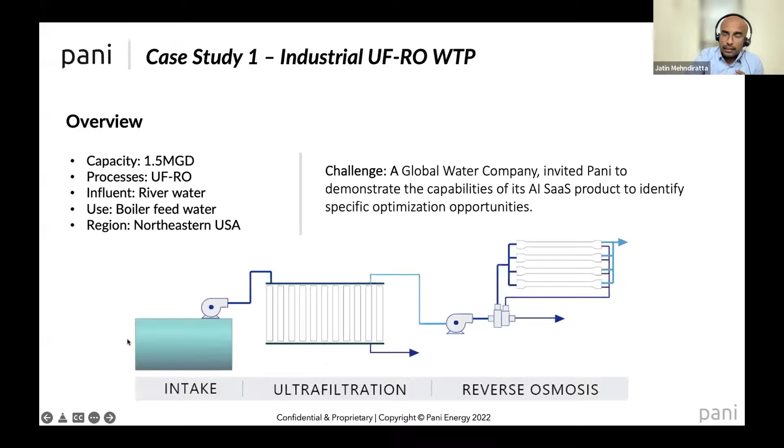Now, going a bit in detail into the first case study, this is how the overall plant looks. It is using ultrafiltration for pre-treatment and RO for treatment. It has a river feed brackish water intake. We were able to save somewhere close to $160,000 for them in a span of 2 years. We were able to give them 30% more successful and effective cleanings.

We were able to give them 38 unique events which their team or their existing capabilities were not able to detect, so that they can prevent these problems from happening and take those actions. And this is how the customer actually optimized overall.

We were able to predict a particulate fouling event well in advance. We were able to separate it from biofouling and scaling, and we were able to tell the customer exactly that this particular event is going to happen in a couple of days, that it would be a particulate fouling event, and what you could actually do.

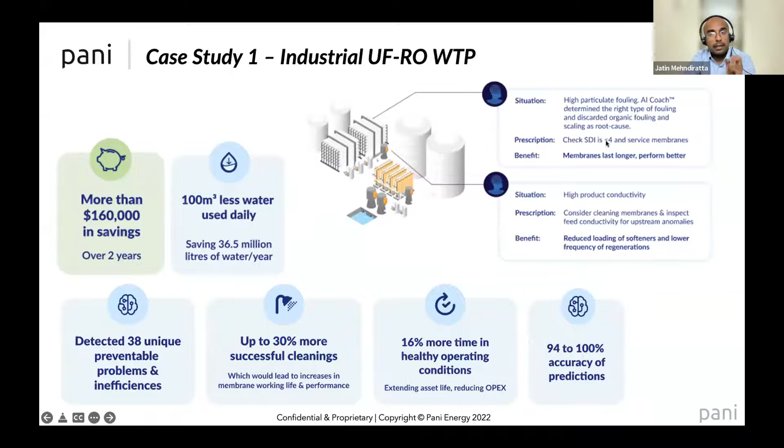So we were able to tell them that you need to check your SDI and ensure that it stays below this level for these particular membranes, and we were able to predict when to service and which membrane to service in order to achieve this.

In the last 3.5 years of operations, we have been adopted by a lot of customers in Canada, the US, the Middle East, Southeast Asia, and India. We have close to 5 to 10 customers running in India today, and we are looking at 20 plus customers getting onboarded in India by the end of this Q2.

Right. So we have been adopted by some leading brands in the water treatment space. We have received a lot of testimonials from some global players. We have been used by food and beverage and pulp and paper organizations. We have been recently adopted by Abunayyan Holding in the Middle East, which is the parent company of WETICO, Nomac, and Torre. So we have been getting adopted and getting recognition across the globe for the capability that we are bringing into the ecosystem.

Now, just to summarize what we do: we are bringing forward a decision expert ecosystem standing alongside your operational, your maintenance, and your process analyst teams in order to solve 3 major things. We bring more reliability into your ecosystem by mitigating your risk, help you extend the asset life cycle that you're using today, and reduce the overall OPEX in terms of maintenance cost, energy cost, chemical dosing, etc.

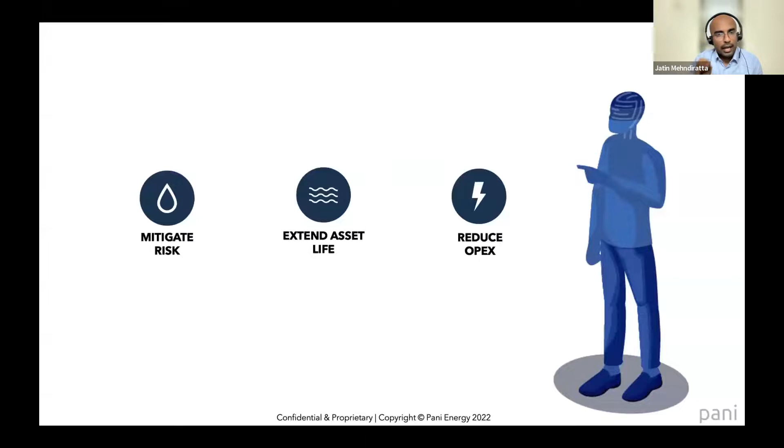All of this is done seamlessly by a subscription-based, monthly payable software AI operator coach from Pani Energy. It's a cloud-based solution, IoT and AI powered, used for plant-wide remote monitoring and optimization. It helps you get data centralization and advanced reporting. You can have your user-defined roles, KPIs, alerts, and analytics on the go, and automated daily, weekly, and monthly reports.

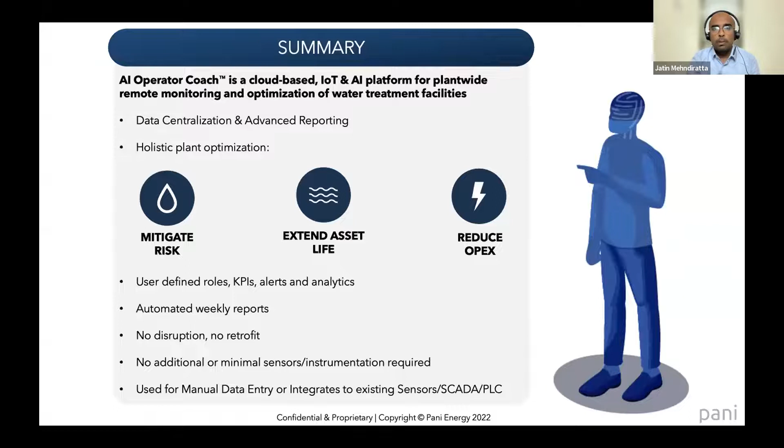It needs no disruption and no retrofit of your existing setup. There is no additional, or maybe very minimal, sensor or instrumentation required depending on the site. This could be used for sites which have manual data entry, or could be integrated with sites which have existing sensors, SCADA, and PLC.